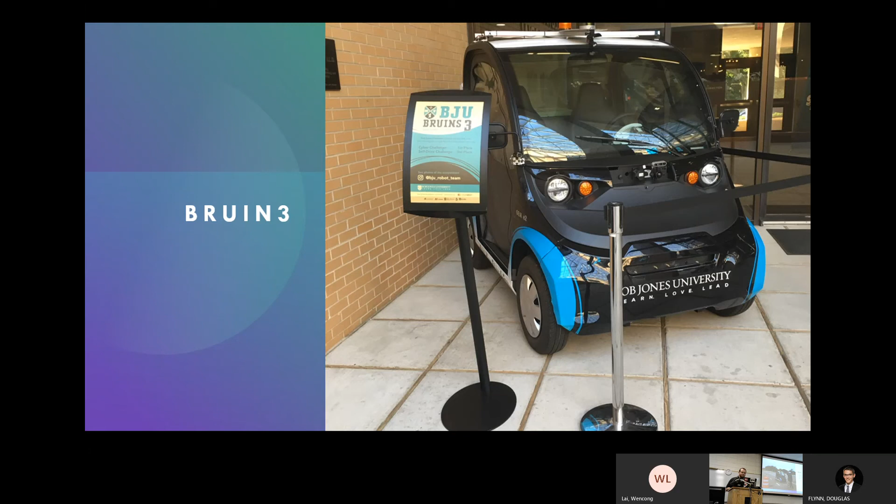Okay, so this is IGVC, the Intelligent Ground Vehicle Competition. It is government sponsored, but there are also other sponsors that come in and help with the prize monies and whatnot. We were sponsored by the government, and that's why we have access to RTK software. It is military robotic software. And the reason for this competition is because, as you know, everything is becoming automated.

There's soon going to be self-driving cars. Most of the machinery now is automated robotics. And the military wants to use that, and the government wants to use that as well. So they sponsor different colleges to come out and use different software so they can develop autonomous vehicles.

Particularly, we're talking about autonomous vehicles in urban environments. So a lot of the competition focuses on things that we do around Greenville and around town, staying in lane, doing the speed limit, lane switching, watching for pedestrians, stopping at lights, and just regular things that autonomous vehicles will have to learn how to do.

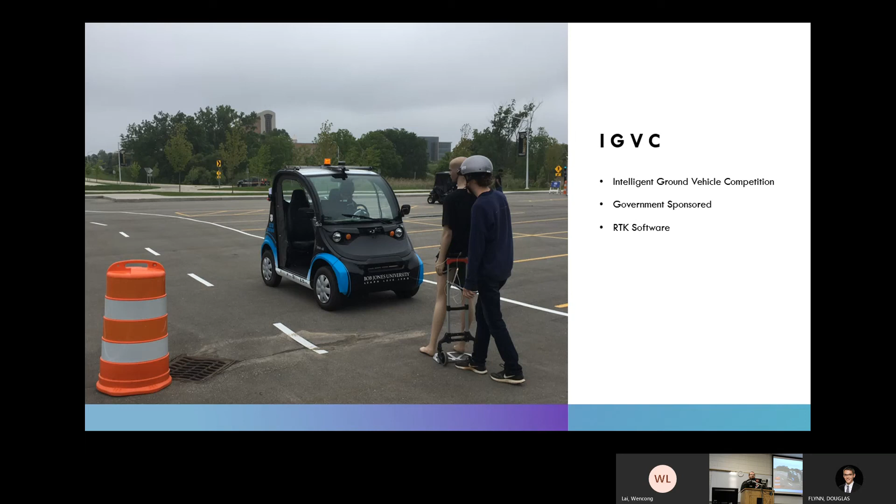So there were three main things that we did this semester. The first one is the speedometer. As you see, we 3D printed a case for one of the mounts. It's pretty basic, not too complicated, so we excluded it - we could really do it without it, but it's just easier that way.

The real focus is on this piece right here. The connector we had is called a DB9 pin, and the only thing you really have to know about it is that you can't plug it into the vehicle. There's no port for it, so we had to design our own. The red box shows the connector we made - it's just another DB9 pin. We soldered three wires onto it and connected it to the car's computer.

So we connected it to the CAN bus, and CAN stands for the Controller Area Network. It's a bunch of wires that connect to all the electrical and computer software on the vehicle, and it's easier that way for a few different reasons. Number one, it's good for safety features because for the GEM, you can't drive with the parking brake on, so it has a sensor at the parking brake that tells the engine don't start unless the parking brake is off. And it's not just that, but all the warning lights are connected to it as well, and all that goes through the CAN bus.

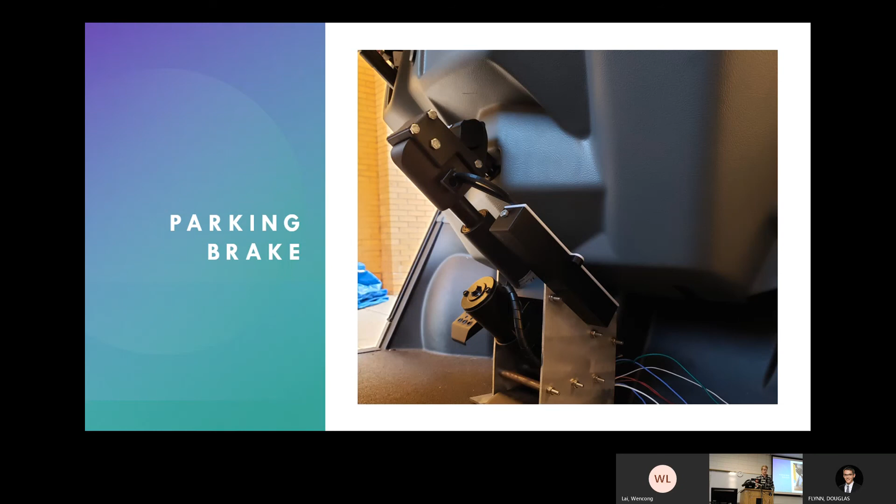All right, so from the housing design itself, we wanted to, first of all, primarily be non-destructive. Second of all, we wanted to reuse that motor, which was actually part of Bruin-1, and take advantage of its benefits. It is a screw-type, electrically driven piston motor that pushes a rod out as it goes up and draws it back down. Screw types have a lot of friction in the way they're designed, which means they're good at sustaining loads, like a flat load pressing down on that screw.

And what else? The second feature we were displaying was the parking brake, which right now, in manual mode, is retracted. Is the tape required? Why is it taped? Because, to my knowledge, this morning the clip was breaking that kept the clamp in place. Currently it's in manual mode.

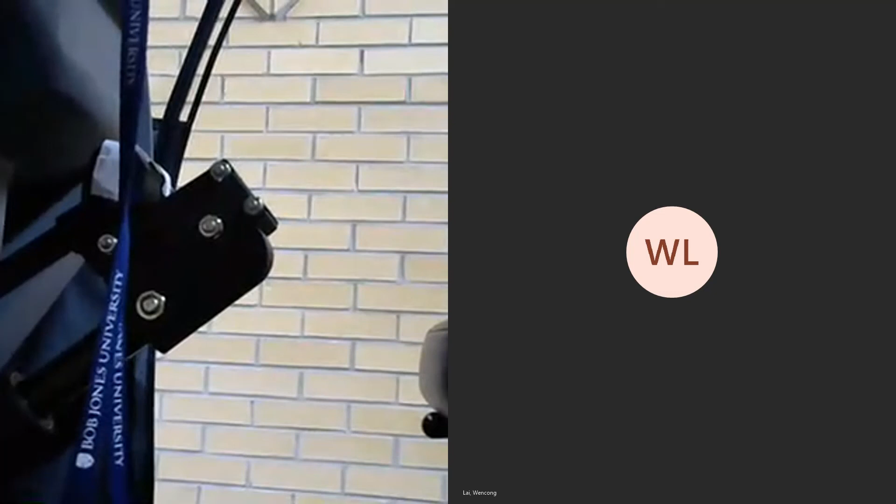Whenever we tell it to go into auto mode, it's out because it's in automatic mode and the car doesn't know where to go. It's in idle right now. But if we tell it to go somewhere, execute to a given waypoint, the brake will retract if this clamp is functional. But since the clamp is broken, it does not go back.

But on reaching its destination... show me what you did from this end. What we did is currently it's driving to a point. If we pause it, the brake comes back out. Okay, I understand.

And forward reverse? Yeah, so for forward reverse, we switch it into teleop mode, which essentially lets us control the car from here. In the simulation, it sends the same commands as if the automatic software were running, so it will publish the transmission input topic, which our relay board will listen to. So I'm going to go watch the dashboard.

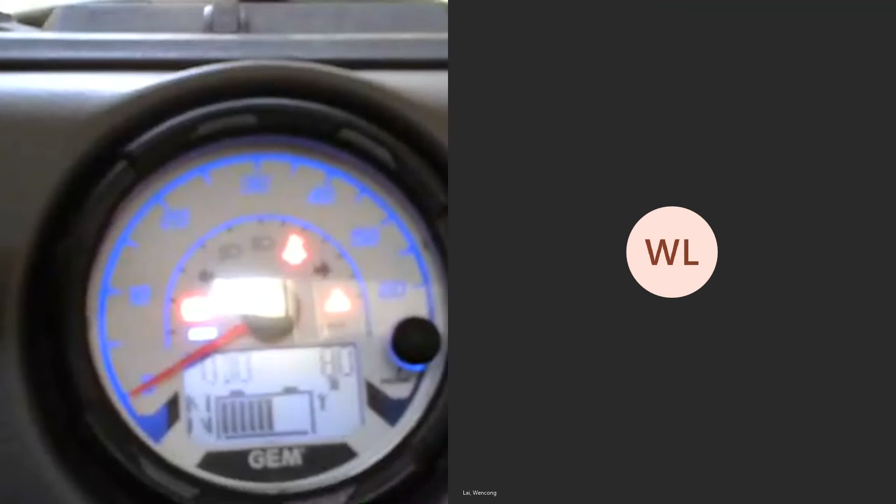Yes, can we hit the gas to see the wheels? So I think the parking brake is on. You can then, right, if we flip this, okay, but if I try more it's not going to change. And if I try to go forward... All right, what else? Is that it?

All right, well, let's go back inside for a little bit of Q&A.

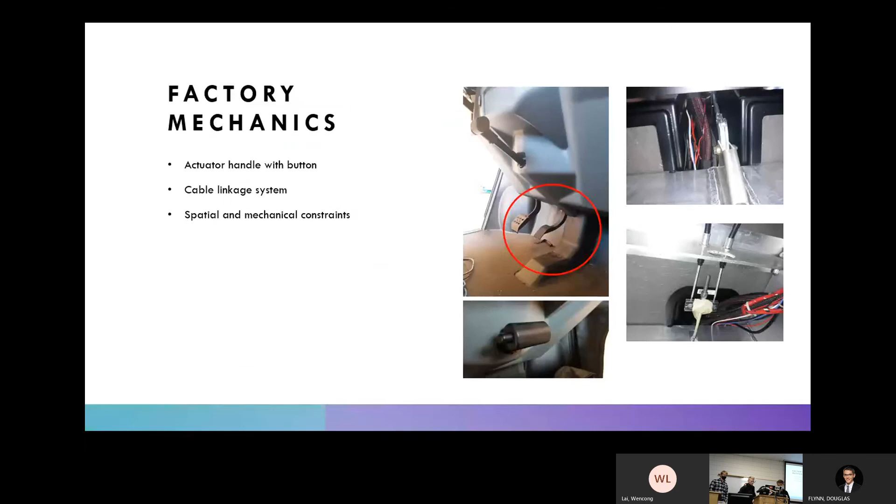Okay, could we go ahead to the parking brake actuator slide? And just to be picky with Michael for a minute, you called it a piston motor. It's a rod-driven screw actuator. Yeah, we call these linear actuators. You could call it a rod, don't call it a piston. Because a piston means something - technically that's pneumatic, activated by a fluid, so it's not a piston. Alright.

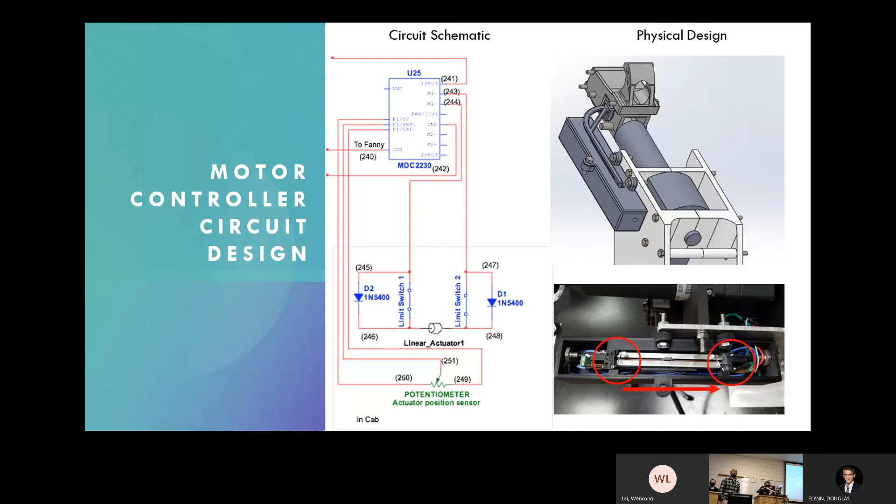Back up one slide - what are those diodes for? The diodes prevent feedback from the limit switches themselves. What do you mean feedback? That is a John and Delano question.

It stops the flow of current in one direction. That turns off the power. When it hits one of the limit switches, it will stop, cutting the current flowing in that direction. So yes, that's what the switches do.

So what do the diodes need to do? Let's say it's going backwards, and we want the current to run left to right. When it gets to the end and hits the limit switch, it'll turn off. But that stops the current from flowing left to right, and we don't want it to stay off. We want it to keep working when we tell it to go from right to left. So when we say we want the actuator to go forward, if there were no diodes, the power would never turn back on.

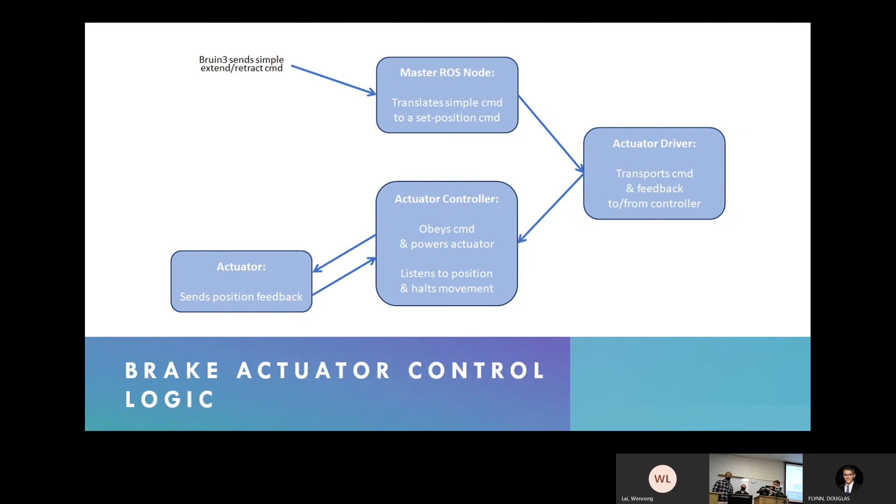I thought this was a three-way position switch. Isn't the current manual switch 3 positions? Forward, neutral, reverse? The physical switch is actually 3 positions, but if you have 2 switches, you can achieve 4 different states. The first switch has 2 different states, and with 2 switches, if the first one is open, this one has 2 states, and when it's closed, that's one state. So in total, we have 3 states that actually matter.

So you've modeled 1 three-way switch with 2 two-way switches? That's correct. When this switch is closed, the other switch does not matter. So there are technically 4 combinations between the two, but 2 of them are the same.

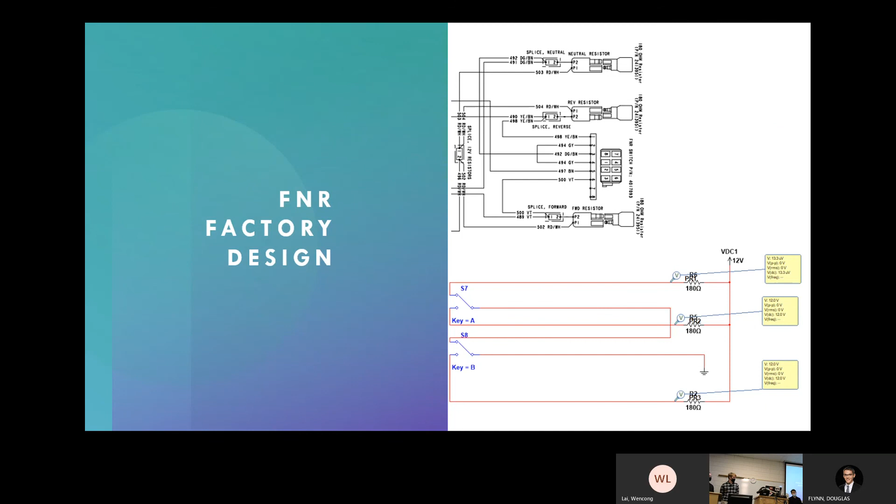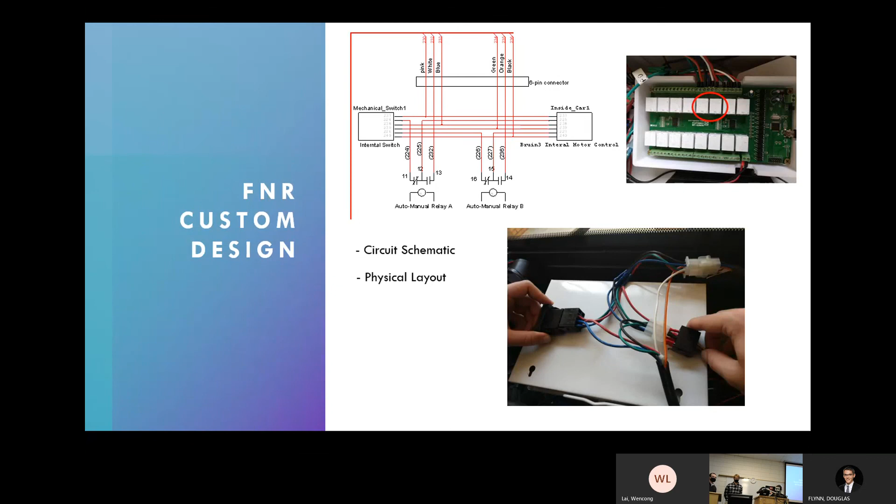Okay, go to the next slide. Yes, okay, I don't have any more questions about that. That was all my questions about the PowerPoint. Do any of you have any questions for the 3 presenters?

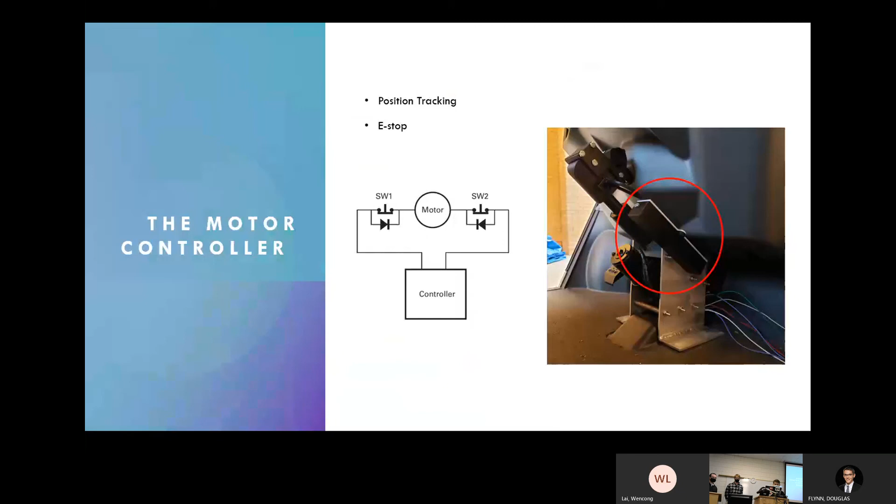If you go back to the first slide, I think it was. Okay, first one. Okay, and then like after the history and stuff. Oh, it's speedometer. Yes. Okay, next picture. Yeah, that.

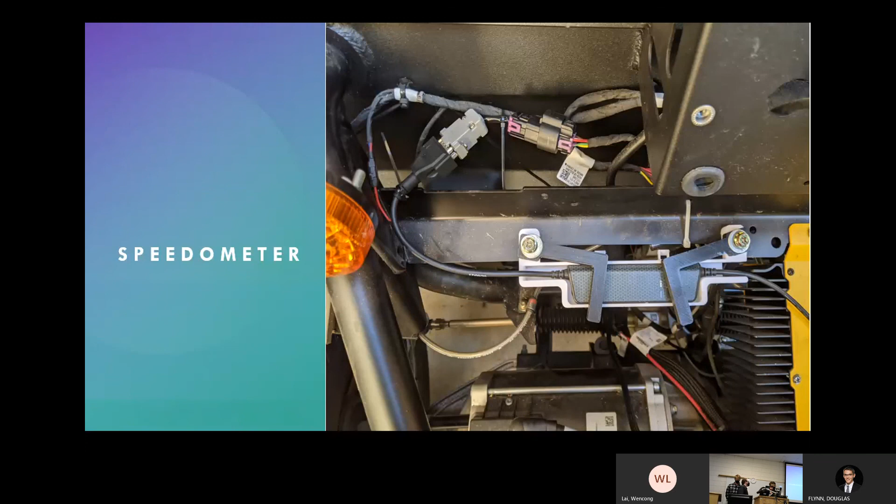So basically that gray thing is just an adapter because the black VGA cannot plug into it. Oh, that one, the red box. Yeah, that's an adapter. It's not a VGA, it's a 9-pin out. There's no plug-in for that anywhere, so you have to build an adapter or buy one that has the same.

And you custom made that? Yes. So what's the black plug on the right? The black plug is a vehicle-specific plug-in. That goes straight to the CAN bus. That's the CAN bus connector.

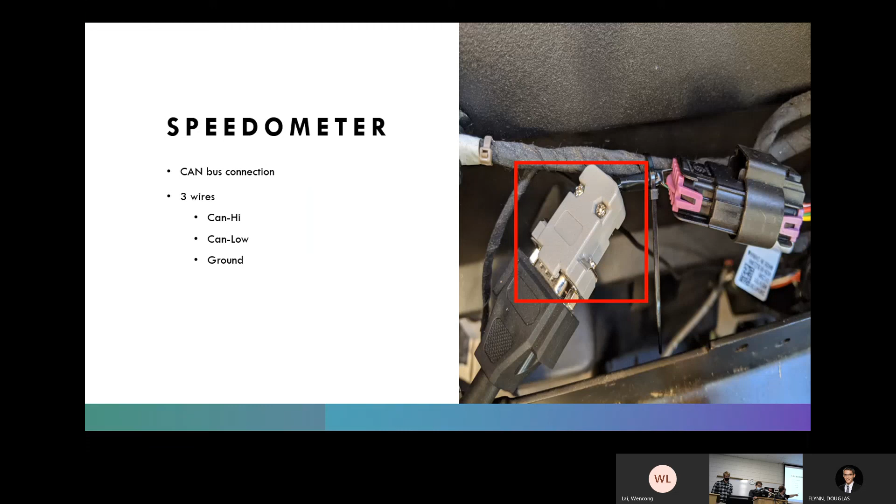And what's the black box on the left? Oh, that is part of the pin out, the 9-pin out. Where does it go? What is it? That goes back to the leaf. That does all the reading of the CAN bus. So the CAN bus is just 2 signals that fluctuate up and down, and that device, it's a leaf, called a leaf V2. That takes those voltages and is able to read them and put them into actual code that we can use.

The transition, the CAN bus line, is right here, because in between is the leaf, and it takes it, reads it, and forms it into coherent things we can actually use. It would have been very helpful to put the leaf in that picture. You didn't actually say a word about the leaf, and somebody just listening to this presentation would have no idea that the leaf is there or what it does. That would be a nice extra box to have here. The CAN bus sends the data stream to the leaf, and the leaf sends the data stream to the computer. Does that make sense?

Anything else anybody's curious about? What are they doing next year?